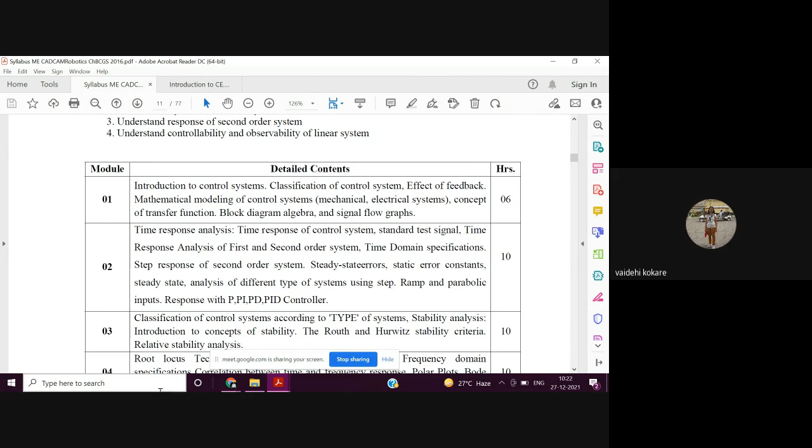So this scheme, you have only one paper that is 80 marks, and I don't know whether it will be online or offline examination. Most probably it will be offline, and you will have to complete 2 semesters in this semester, meaning by end of June you will complete semester one as well as semester two. Semester one exam most probably you will give in April first week. Last year it was March end and April first week, and then semester two exam was in July and August. It will be a little taxing because you will attend semester one as well as semester two lectures, but semester two lectures for ME will conduct once your semester one is over, because it is not running parallelly like first year, second year with direct second year admissions. What they are doing is attending regular classes which have started, as well as the backlog.

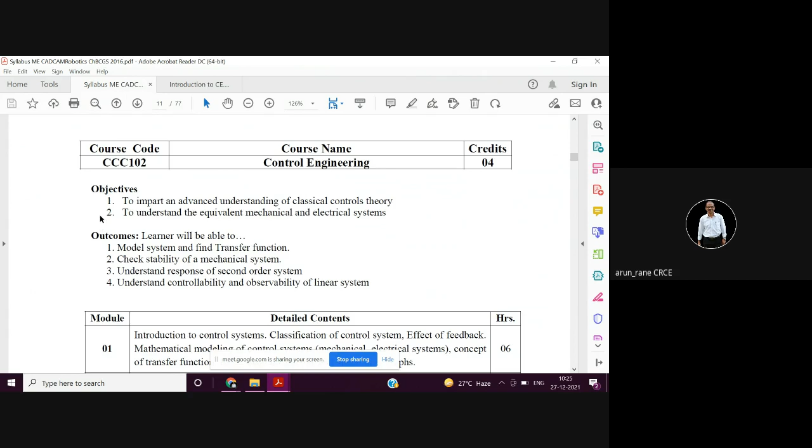The notes I will upload on the classroom. These are the objectives and outcomes of this subject. What are the outcomes? You should be able to model the system and find the transfer function. Transfer function is nothing but somewhat similar to the efficiency of the system. For any system, you have output and you have input, so transfer function is analogous to the efficiency that is given by output by input. Then check stability of a mechanical system.

Any particular system, whether it is stable, unstable or marginally stable, is classified under these three categories. System means like a human being, we have different systems like nervous system, then digestive system, then reproductive system. So if you talk in terms of automobile, automobile means you have transmission system and a suspension system, and then the system is made up of different components.

Like suppose if you take the example of transmission system in case of a vehicle, it consists of clutch, then gearbox. First is of course engine, clutch, gearbox, then you have propeller shaft, then differential gearbox, then rear axle, and wheels are mounted on the rear axle. So that is your transmission system: engine, clutch, gearbox, propeller shaft, differential gearbox, then rear axle, and then wheels.

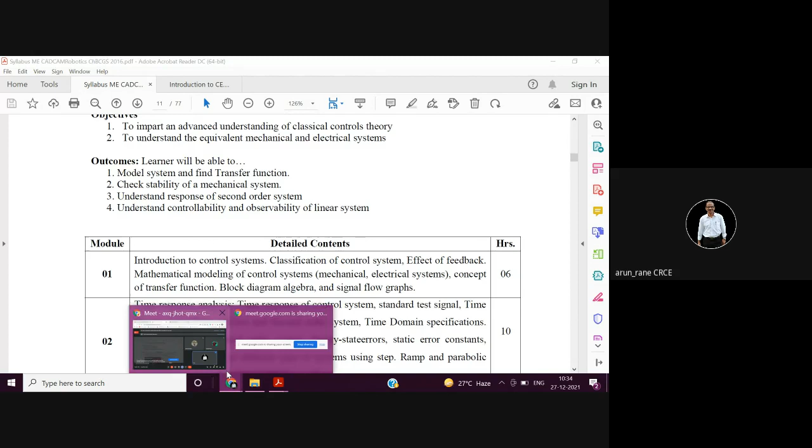So I was talking about response. Systems are divided into first order system and second order system. First order systems are easy, simple, whereas second order systems are complex, difficult.

So at UG level, you must have studied first order systems, and at PG level, you have to study second order systems also. So in your syllabus, second order systems is included. So understand the response of the second order system.

So response is nothing but the feedback. That is the third outcome of this course. Course is nothing but this subject, control engineering, and your program is nothing but ME Mechanical with specialization in CAD and Robotics.

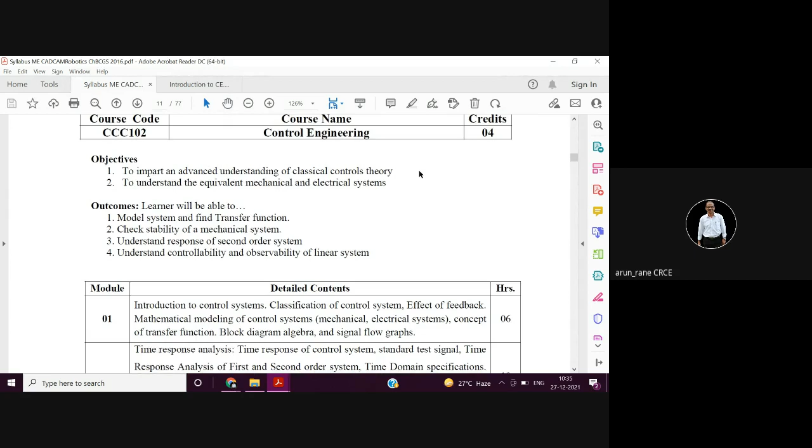Then understand the controllability and observability of the linear system. So it means from a given mathematical model - mathematical model means mathematical equation - you have to identify whether the system is controllable and observable, whether the system can be observed or whether the system can be controlled or not. That can be identified with the help of the mathematical model.

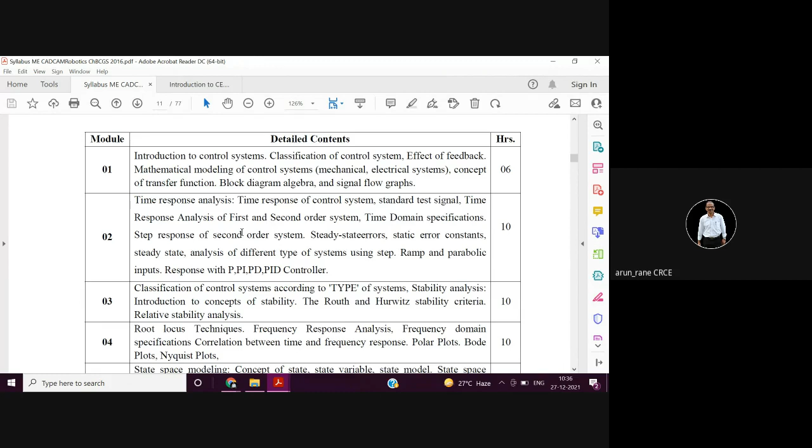Here is the syllabus. So there are a total of 6 modules.

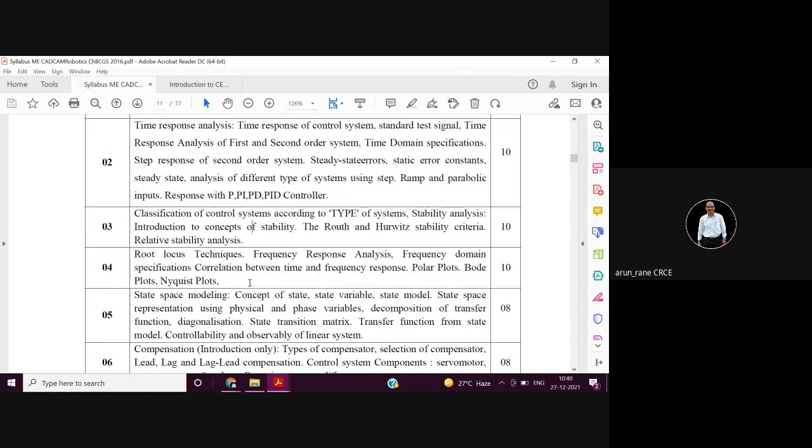So the important part is you focus on module 4, that is root locus. That you might have done. Then you focus on Bode plot, and you focus on transfer function, that is module 1.

So I will just brief you about the different modules. Module 1 is introduction to control systems, how the systems are classified. Then block diagrams and signal flow graphs, which you might have done. Module 2 is your time response analysis.

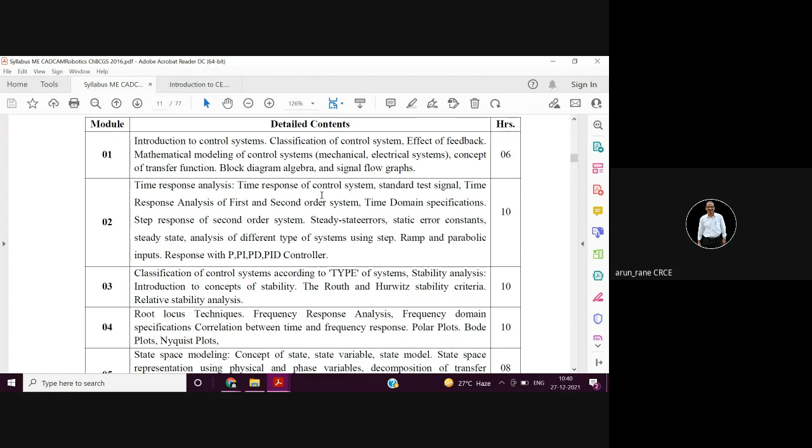That is time response analysis of first and second order system. That is how does the system behave as the time passes. That is what is called time response analysis.

Suppose if you entered at Virar, then what is your progress towards getting the seat over a period of time? When t is equal to 0, you have entered. Then after 5 minutes you are a little inside, after 10 minutes further inside, after 15 minutes near the seat, and after half an hour you got the seat and have become stable.

So at the entry you are unstable, and after half an hour you are stable. That is nothing but time response analysis. Your task is you should become stable as early as possible, that is within no time.

So the same thing is applicable for any system. This is what is time response analysis of the control system.

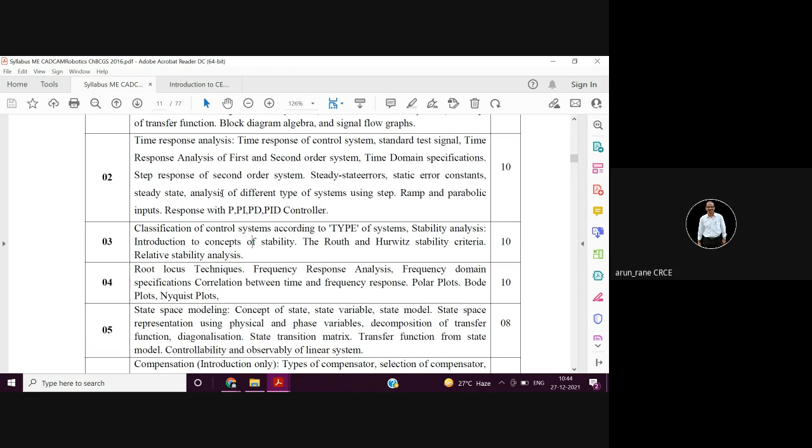Third module is how to analyze whether the system is stable, unstable, or partially stable.

So there are some techniques. See, any system can be a mathematical model, except like feelings, human feelings. You cannot mathematically model it. Emotions, anger is difficult to model mathematically.

And you don't have to manufacture and test the system to check whether it will be stable or not. Just using some techniques, you can conclude whether the system will be stable or unstable. So these techniques are Routh's and Hurwitz's stability criteria, root locus criteria, polar plots, and Bode plots and Nyquist plot. So these are the techniques.

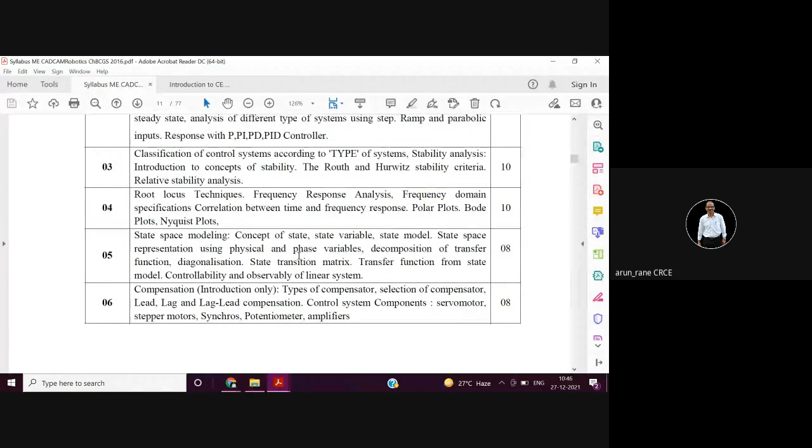State space modeling is another technique of modeling the system, and in order to check the controllability and observability, this is very important, the state space model.

Then the last module is totally theoretical, and it is at introduction level only. That is how to compensate the different errors in the system. So there are different types of compensators: lead compensator, lag compensator, then lead-lag compensator.

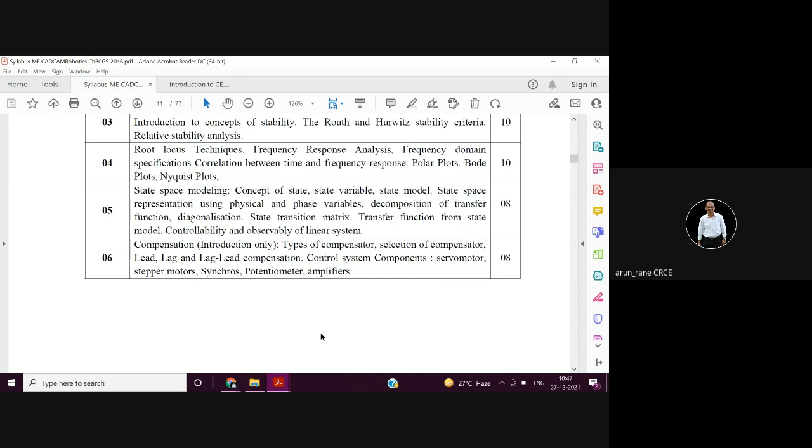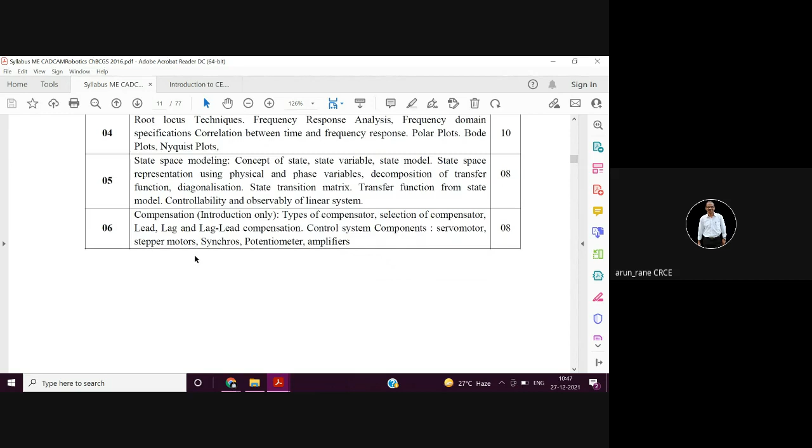Plus, module number 6 has some theory of servo motors, stepper motors, synchros, potentiometer, and amplifier.

So this was the syllabus.

Then coming to the books, there is a popular book that is Control Engineering by Goyal Bakshi, and we have many copies in our library. Unfortunately, e-copy is not there. So if you are coming to the college, you can always take it. So Control Engineering by Goyal Bakshi is one book that is sufficient, which covers your entire syllabus.

That is, if you want to study in detail, then you have a second reference book, that is Modern Control Engineering by Ogata, and you also have Control System Engineering by Nagrath.

Most of the students refer to Goel Bakshi and then Ogata. We have Ogata as well as Nagrath also, and we have many more books on control engineering because this is a compulsory subject in electronics and telecommunication engineering, in the third year. So we have many copies, so you can get them. But Goel Bakshi and Ogata is sufficient.